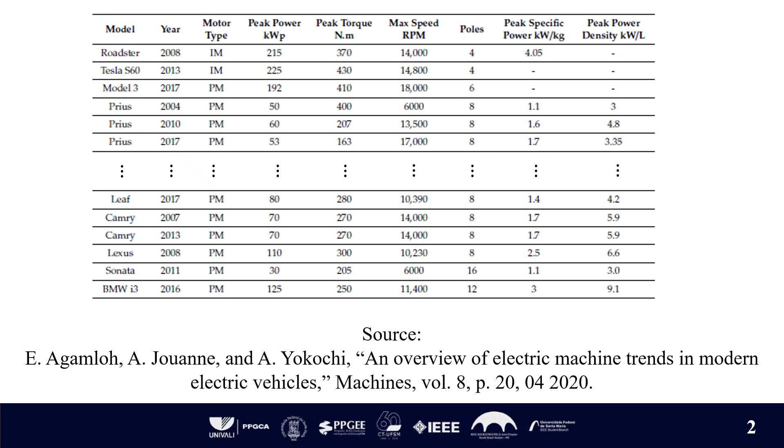Agamloh et al. evaluated a series of machines used for traction in electric vehicles produced between 2004 and 2017. They concluded that of the 18 electric machines considered, 16 were radial flux PMSM and 2 were induction machines. Therefore, radial flux PMSM are the prevalent option for the traction of electric vehicles.

The main motivation behind this study is the growing demand for high-performance electric traction systems. The YASA topology, which means yokeless and segmented armature, removes the stator yoke, reducing iron losses and mass. This work compares the performance of the YASA machine with a more conventional radial flux PMSM.

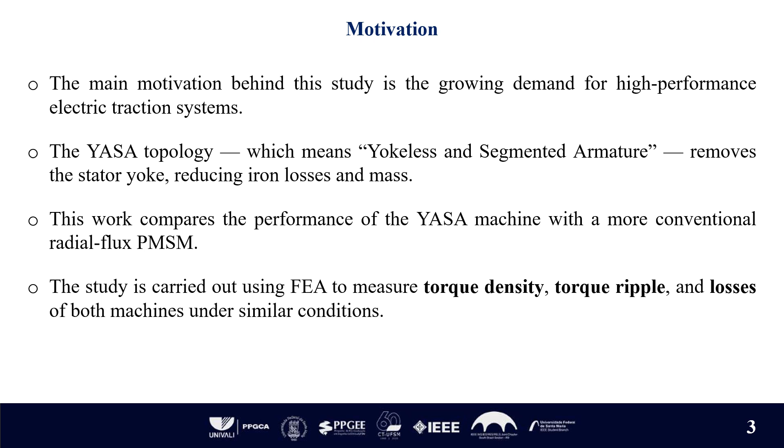This study is carried out using finite element analysis to measure torque density, torque ripple, and losses of both machines under similar operating conditions.

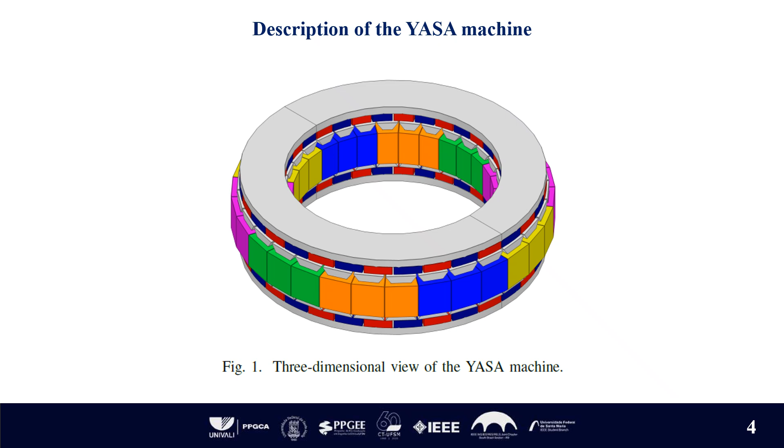Figure 1 illustrates a three-dimensional view of the YASA machine investigated in this work. The YASA machine has two external rotors with surface-mounted permanent magnets and an internal segmented armature. The armature is built using laminated grain-oriented steel, which is possible because the magnetic flux flows through the segments preferentially in the axial direction. 1010 steel is used for the rotor back iron.

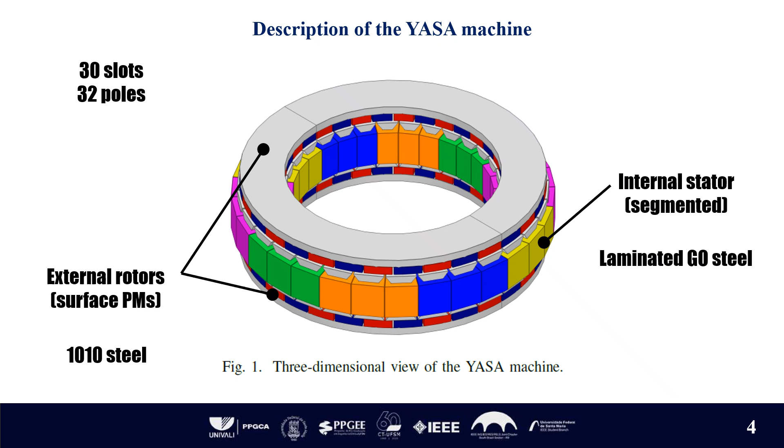This machine has 30 slots, 32 poles, 5 phases, and 0.1875 slots per pole per phase.

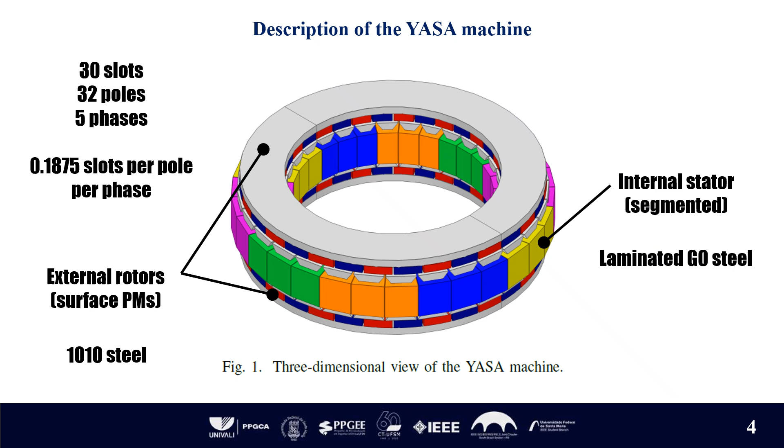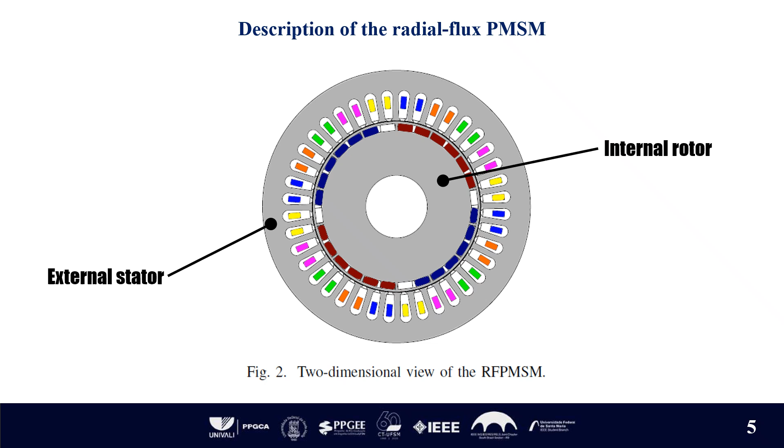Figure 2 illustrates a two-dimensional view of the radial flux PMSM investigated in this work. The radial flux PMSM has a more traditional design. It has an external stator and an internal rotor. The rotor has 28 slots, housing 24 PMs that create 4 poles in the air gap.

This machine has 40 slots, 4 poles, 5 phases, and 2 slots per pole per phase. The magnetic cores are made of laminated non-oriented steel.

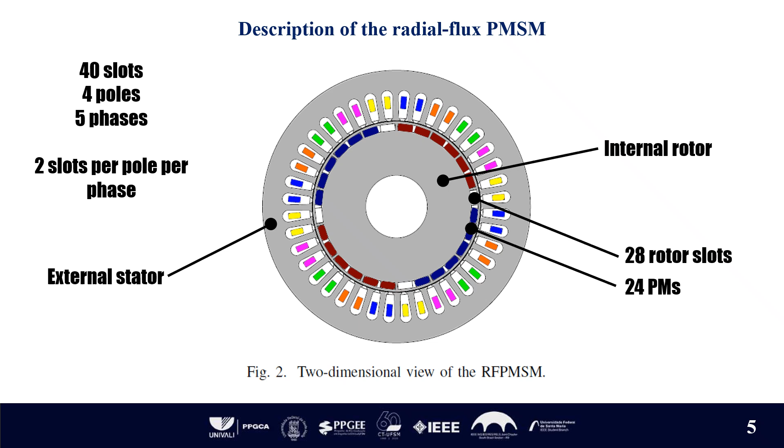To make the comparison fair, both machines were designed with similar dimensions and materials. They share similar outer radius, similar axial length, and similar slot fill factor. Both machines use the same grade of neodymium iron boron permanent magnets.

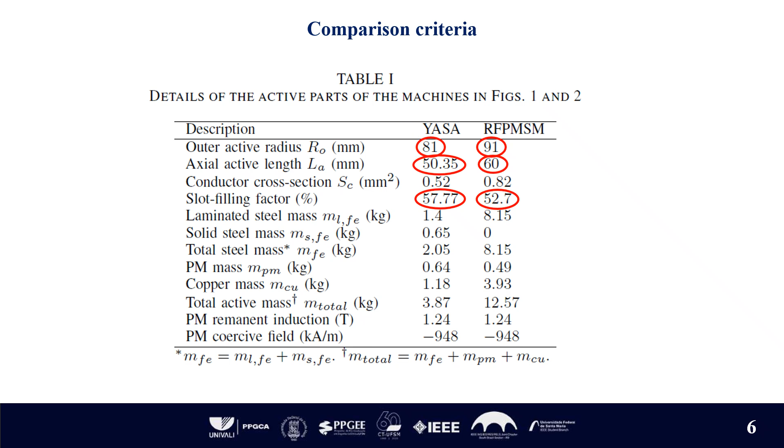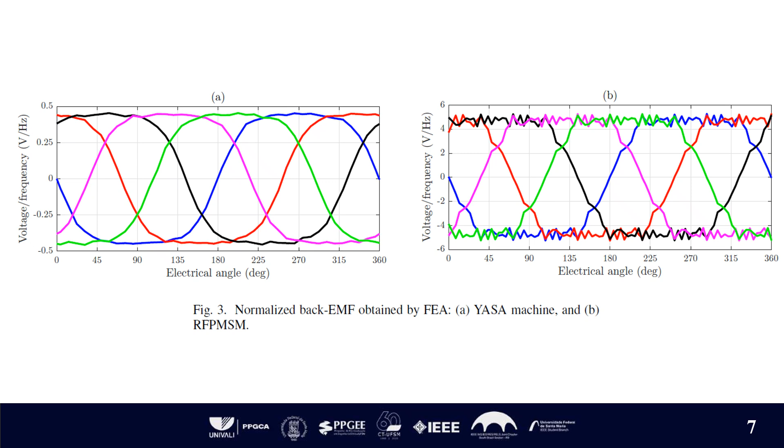Their back EMF waveforms include a third harmonic component, as can be seen in these figures. Figure 3a shows the back EMF of the YASA machine, and Figure 3b shows the back EMF of the radial flux PMSM. As can be seen, the slot effect on the back EMF is more significant in the radial flux machine than in the YASA machine.

In the YASA design, grain-oriented steel is used for the armature segments, while 1010 steel is used for the rotor back iron. Figure 4 shows the magnetization curves of these materials. Figure 5 illustrates the magnetic loss curves of grain-oriented steel in the preferred flux directions for 60 Hz, 100 Hz, and 160 Hz.

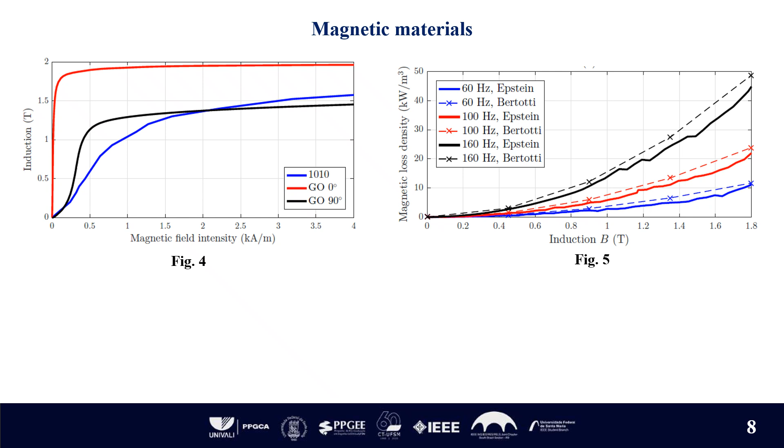The finite element analysis was conducted using 2 current densities, 6 and 18 ampere per square millimeter, and frequencies ranging from 60 to 240 Hz. This approach allowed us to study how both machines behave under light and heavy electrical loading, and to identify how current density and frequency affect torque and loss performance.

Figure A on the left illustrates a result of the 3D finite element analysis performed with the YASA machine, while Figure B on the right illustrates a result of the 2D finite element analysis performed with the radial flux PMSM.

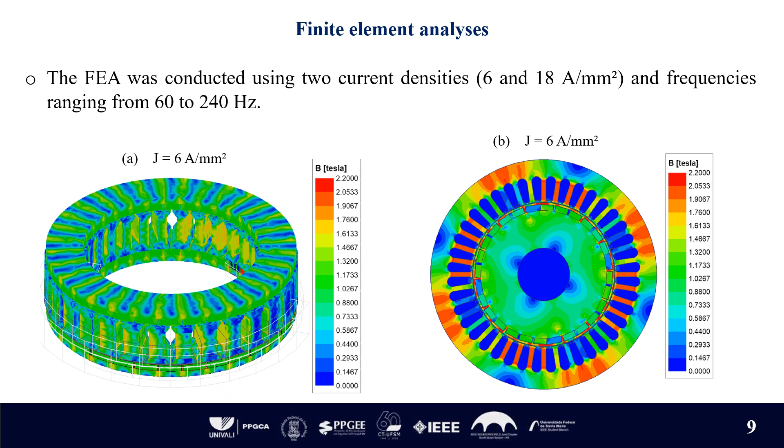When the current density was increased from 6 to 18 ampere per square millimeter, the torque of the YASA machine nearly tripled. However, in the radial flux PMSM, the magnetic circuit became saturated, so the torque increase was smaller.

To obtain the torque density of each machine, the average torques were divided by the masses of each material and the total volume, resulting in the torque densities summarized in Table 3. At a current density of 6 ampere per square millimeter, the YASA design provided 60% more torque per total mass than the radial flux PMSM.

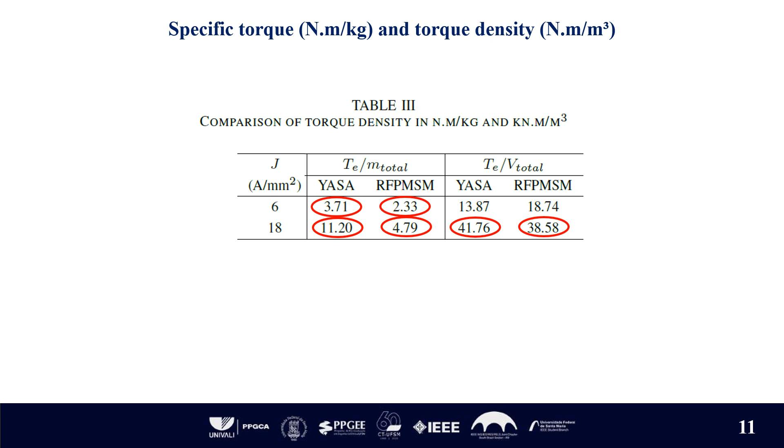When operating at the higher current density of 18 ampere per square millimeter, the YASA machine outperformed the radial flux PMSM even more clearly. Further, at a current density of 18 ampere per square millimeter, the YASA design provided 8% more torque per total volume than the radial flux PMSM. These results indicate that the YASA machine with high current density achieves better torque densities than the radial flux PMSM.

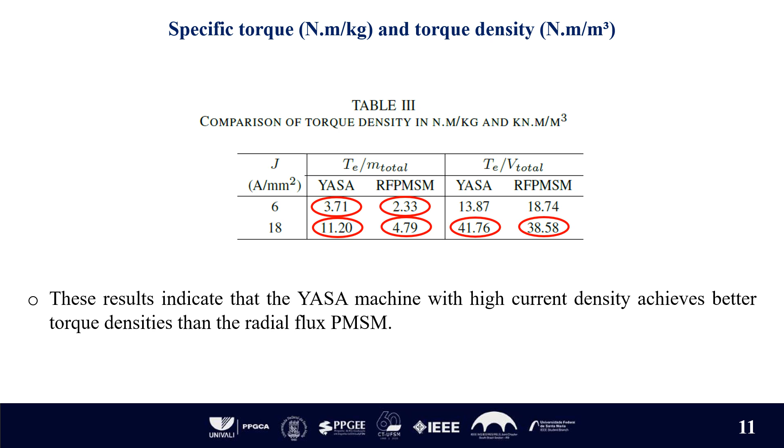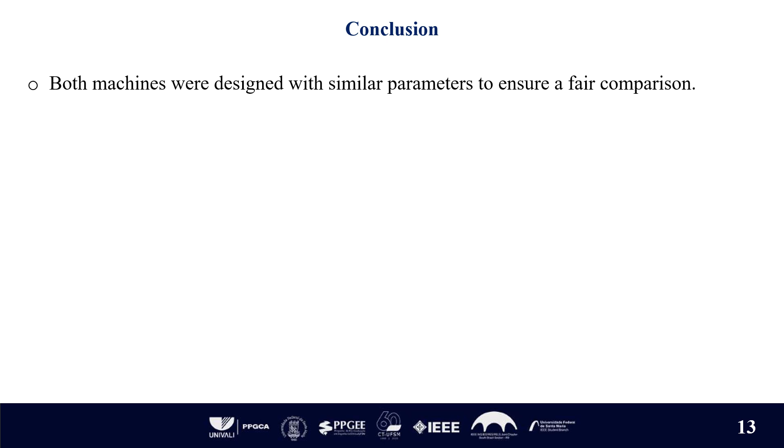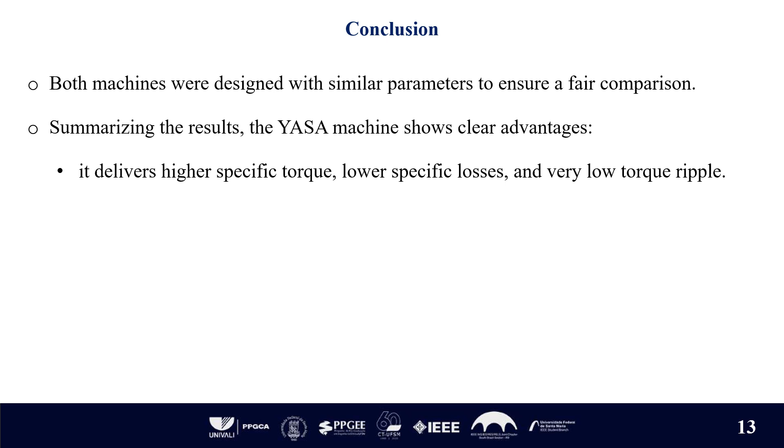In conclusion, both machines were designed with similar parameters to ensure a fair comparison. Summarizing the results, the YASA machine shows clear advantages. It delivers higher specific torque, lower specific losses, and very low torque ripple. For applications that require lightweight, compact volume, and high efficiency, the YASA design with a high electrical loading is the more appropriate choice.